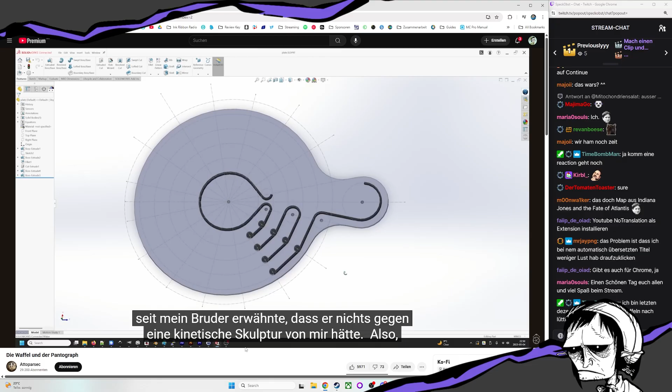But then those concentric rings got me thinking about classical labyrinths, and that's a form I've been meaning to work with for a long time now. I actually have a fairly complete design for a roller chain labyrinth, which I've been working on ever since my brother mentioned he wouldn't mind having a kinetic sculpture of mine.

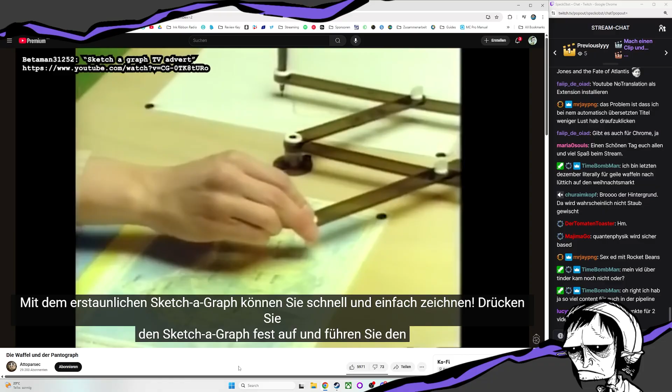You can draw quickly and easily with the amazing Sketch-a-Graph. What? Pin down the Sketch-a-Graph firmly, guide the pointer over any map, picture or pattern.

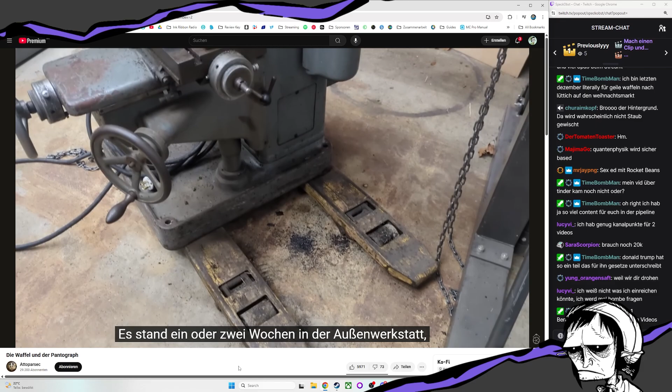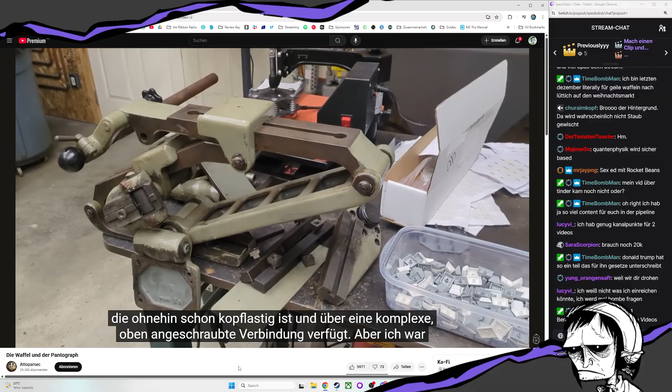It sat in the outer shop for a week or 2 as I carefully disassembled as much from it as possible. It was very heavy, but worse, this thing was top-heavy in particular. That makes sense as it's basically a vertical mill, which is already a top-heavy thing, with a complex linkage bolted on up top. But it did leave me a bit nervous about moving it around by myself.

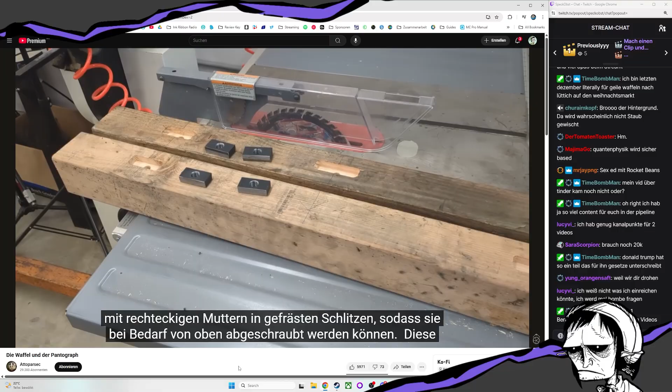I also made a pair of 4x4 skids to bolt it onto, with rectangular nuts and milled slots, so they can be unbolted from the top if need be. These would help me with stability during the move, and also let me set it on the pallet jack, which I was otherwise unsure about due to the forks not fitting very well under the base.

For the 84% of you new to the channel since the last time I brought home a giant lump of cast iron, there's one important thing you have to understand. There is a 6-inch drop from the outer shop, where the garage door is, into the inner shop where the machine tools live. Combined with not particularly tall

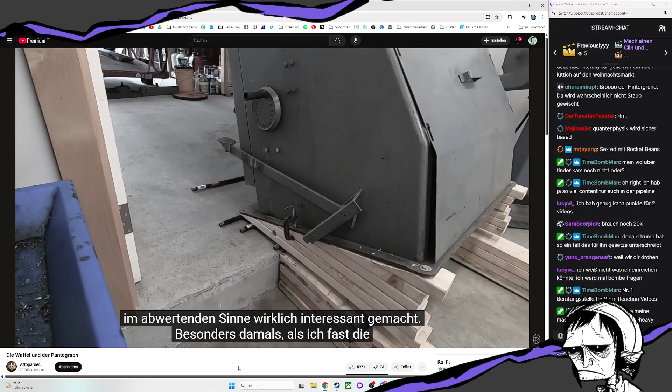ceilings, this has at times made moving equipment really interesting in the pejorative sense. Particularly that time I almost let the bandsaw tip over, because the only way to make the geometry work was to move it through the doorway while leaning back at a 15-degree angle. It all ended up okay, but I wouldn't try it again. Thankfully, this time went a lot smoother.

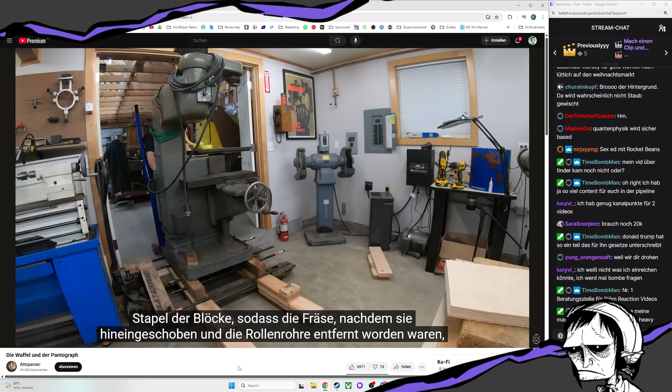I tried something new, including the pallet jack in the stack of blocking, so that after sliding the mill in and removing the roller pipes, it could be immediately moved away from the doorway. This made removing the rest of the blocking a lot easier, and thus safer.

If I'm going to be crouched down operating a toe jack, while a ton of cast iron tips back and forth above me, I really want to be out in the open, so I can flee in any direction if things go pear-shaped.

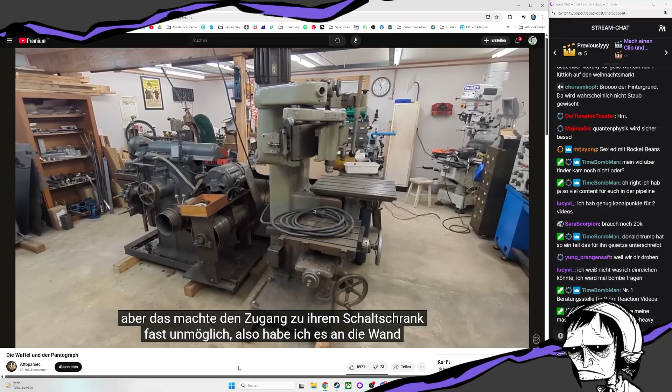At first I placed it next to the shaper, but that made access to its electrical panel almost impossible. So I moved it over to the wall next to the rotary phase converter. This also made wiring it in a lot easier.

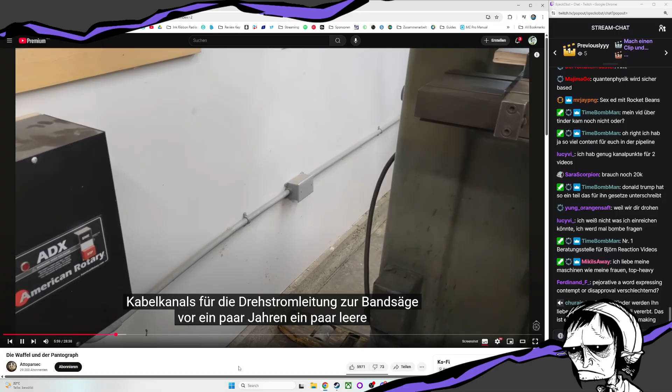As when installing the conduit for the 3-phase line over to the bandsaw a few years ago, I included a couple blank junction boxes for future outlets, should I ever get more 3-phase equipment. Good thinking past me. The inner shop is definitely starting to approach the status of cramped, but I still have room for at least one

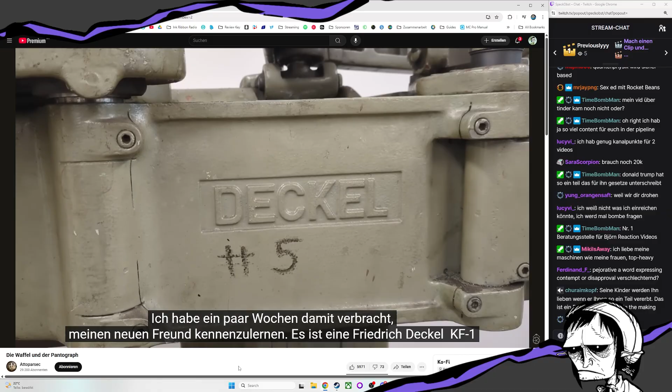It is a Friedrich Deckel! Yeah, baby! KF1 pantograph mill from sometime in the middle of the last century. It was a seriously nice machine, though this one hasn't had an entirely easy life. Basically, you put the thing you want copied on the right-hand table, the copy-holding table, and trace around it with the pantograph stylus. This moves the cutting head on the table on the left, the work table, in the same path in all 3 dimensions, or one scaled up or down depending on how you have it configured.

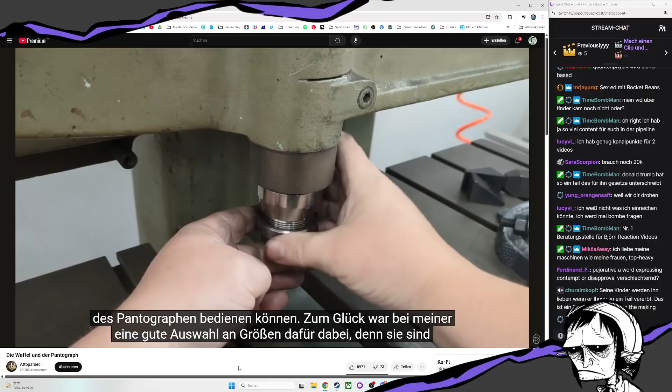First, I needed to be able to operate the collets on both the stylus and cutter side of the pantograph. Luckily, mine came with a good range of sizes for these, as they're ridiculously expensive, but it didn't come with any wrenches for actually operating them. These were the relatively specialized sizes of 42 and 42 millimeters on the cutter side, and 36 and 32 millimeters on the stylus side. Ideally, I wanted a pair of 42-36 and 42-32 millimeter double-ended wrenches so that just the pair of them could serve both jobs and they would just live by the mill. Failing to find any, I drafted up a simple wrench design which I sent off to get cut.

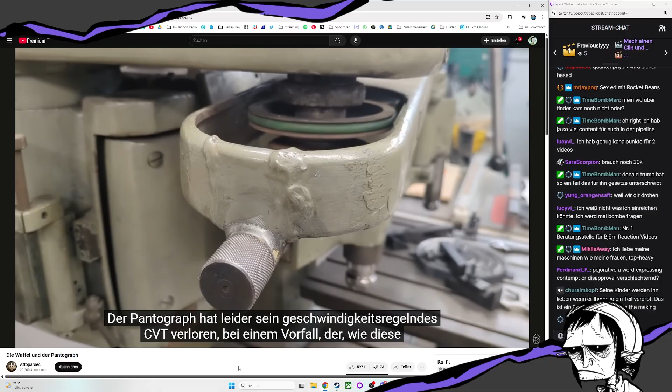Solved. The pantograph has lost its speed-adjusting CVT, unfortunately, an event that this rather clumsy repair on the cowling

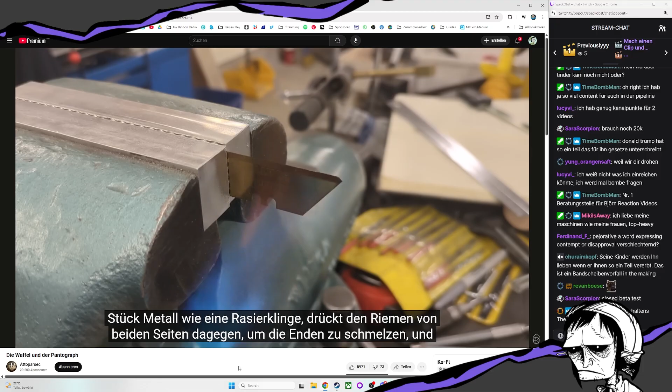suggests was at least moderately energetic. It's been replaced with a simple fixed belt drive, which in turn drives the round belt which runs out to the cutting spindle. The round belt that came with the machine was shedding fiber every time I turned it on, so I figured it was best to replace it now. I got some urethane round belting, and finally got to try that trick I'd seen, where you heat up a thin piece of metal like a razor blade, push the belt against this from both sides to melt the ends, then slide them up off the blade into contact with each other, welding them into a single loop. And it worked. First try.

Mine also lacks the attachments needed to either scale up or down in size while copying a part. Scaling up isn't much of a loss because you can't really cut hard metals that way anyway. The leverage is working against you and you can't maintain control of the cutting end. Or at least, that's my purely theoretical understanding. But being able to scale down really would be nice, if only just to be able to engrave text at a reasonable size. Spare parts for these are rare and pricey, but I think I should be able to make my own. But that's a future project.

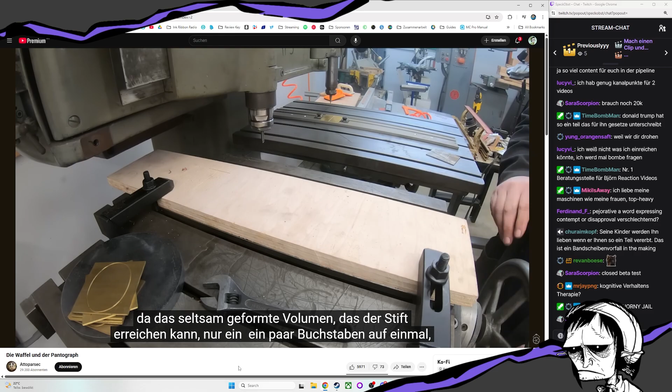I bought a set of engraving letter templates to play with, and shortly after learned that the name for this weirdly ubiquitous typeface is Gorton. It's iconic yet anonymous, which is a really cool combination. The letters turned out to be a bit large, as the oddly shaped volume which the stylus can reach can only handle a couple letters at a time, but it did make me feel more confident about setting things up for copying. So it was time to get serious about the waffle thing.

After failing to find one at local Goodwills, I ordered the cheapest waffle iron I could find that had removable plates, and set about designing my replacements. As well as mimicking the overall dimensions so it would actually fit in the waffle iron, I also made the slots on mine have the same profile.

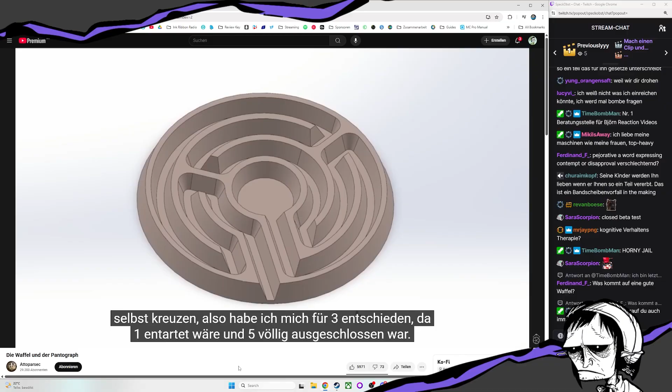At first I directly designed the waffle, so I could work things out like how many concentric rings there would be and what the path layout would look like. The number of rings has to be odd or else the path would have to cross over itself, so I went with 3, as 1 would be degenerate and 5 was right out. But what I needed was a design for the plate that would make the waffle, not the waffle itself. I needed to make a waffle negative, that is.

And the plate had to be machinable, which meant the path had to be something a cylindrical or conical shape could move through. So you can have sharp exterior corners, since that's

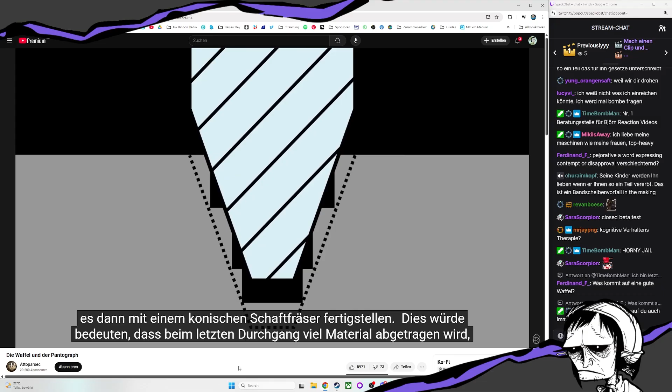This would mean the last pass was cutting a lot of material, but I was planning to do this in cast iron, which is quite machinable, so I was hoping that could work. The other option would be to print out a full 3D template of the entire plate. On the pantograph, between each pass, both the copy holding and the work holding table would be raised slightly. This means the stylus would trace out a slightly different path as it worked its way down the tapered sides of the slots. The majority of the...

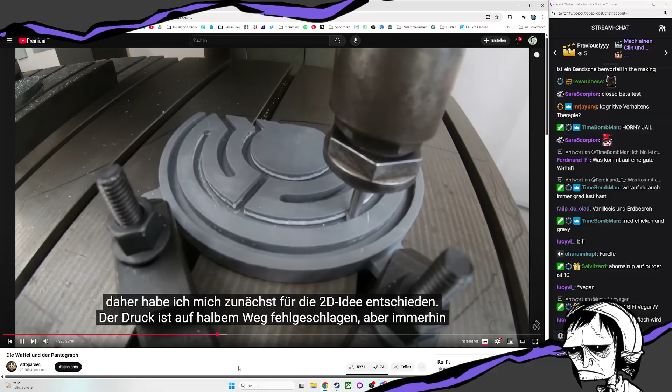Print failed halfway through, but at least I could set it up in the pantograph and try the basic idea instead.

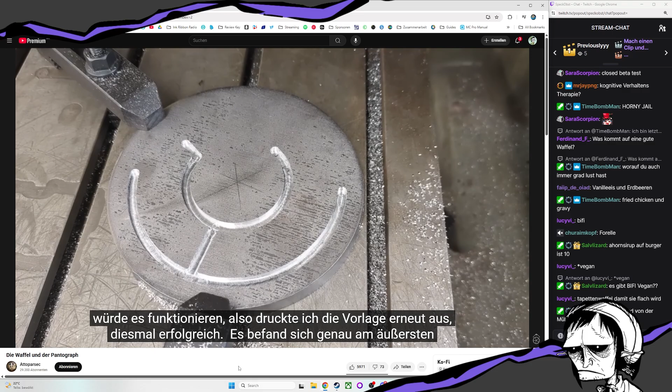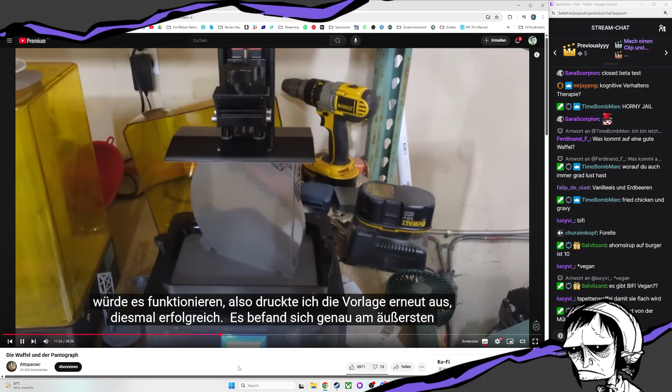It was right at the very edge of my print volume, only fitting if I placed it vertically, running from one corner to the other of the print plate. I even had to go with 4 clamping lugs instead of 3, so that they could be placed 90 degrees apart and not add to the height.

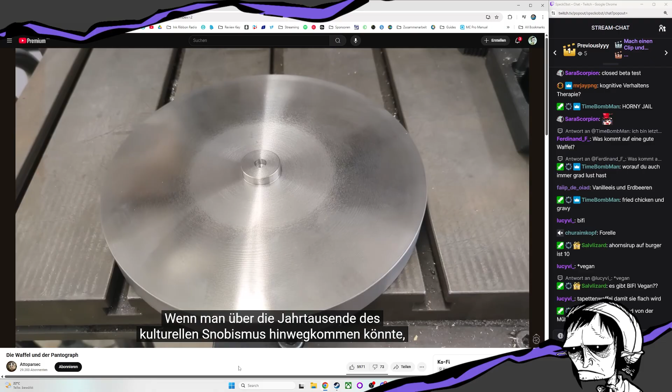Plus, I just think machined cast iron is gorgeous. If you could get over the millennia of cultural snobbery, I really think that the luster of machined cast iron would be ranked as highly as that of gold.

I needed 2 discs that were 3/4 of an inch thick and a bit over 7 inches wide. This meant I had to order 1-inch thick discs that were 8 inches wide. Except when they turned up, they were more like 1.3 inches thick. So could I have ordered 1/2 inch thick discs and they would have turned up thick enough to work with?

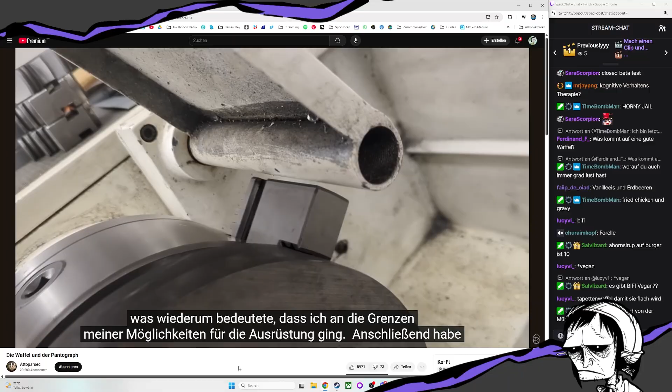We'll never know. First, I cleaned up the faces, which again was running things right at the edge of the envelope for my equipment. With that done, I drilled and tapped a blind hole on one side. This let the blank be threaded onto a mandrel held in the 3-jaw chuck, giving me complete access to the front, sides, and most of the back.

You might think machining is about cutting metal, but that's actually a distant third after thinking about work holding and order of operations. Using this new mounting, I could turn them down to the final thickness of 3/4 inch, generating an endless stream of powdery chips in the process.

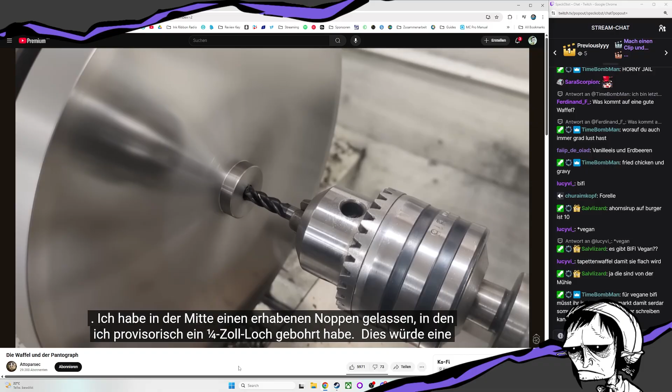I admit, I'm really including the shot to see how the YouTube video encoder handles something so close to pure noise. The front face wasn't made entirely flat though. I left a raised nub in the middle, in which I drilled a temporary 1/4 inch hole. This would provide easy centering when I set them up on the pantograph.

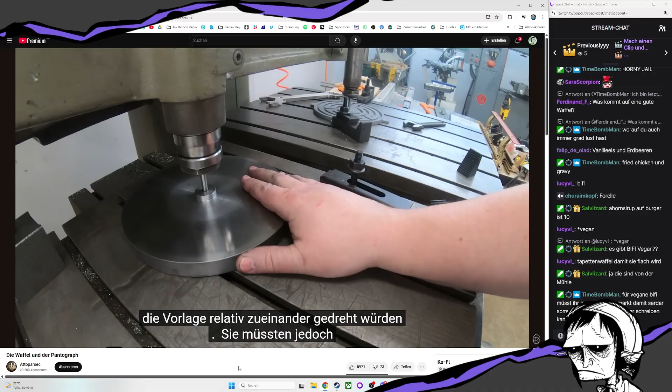It wouldn't matter how the blank and the template were rotated relative to each other, being circles, but they would have to be exactly the same distance apart as the pantograph stylus is from the cutter, or else the labyrinth wouldn't be centered properly in the disc. The easiest way I could think to do this was to include a centering hole in the middle of each one, mount rods of the same size in both sides of the pantograph, place these in the holes, and clamp everything down. Simple.

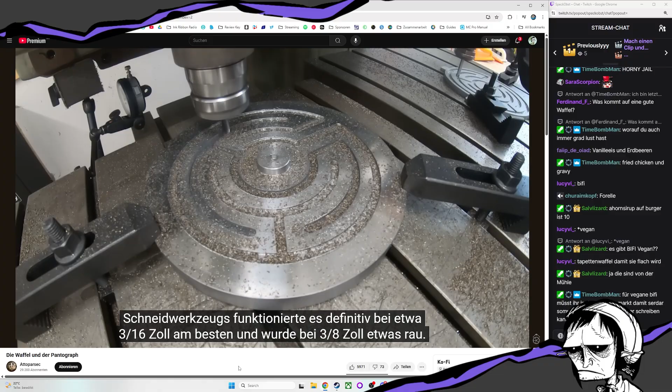As I had planned, I started by using a series of normal cylindrical end mills to remove the bulk of the material. This worked okay, though because of my limited speed control of the cutting tool, it definitely worked best at about 3/16 inch and was getting a bit rough at 3/8. Because I was cutting down into what would...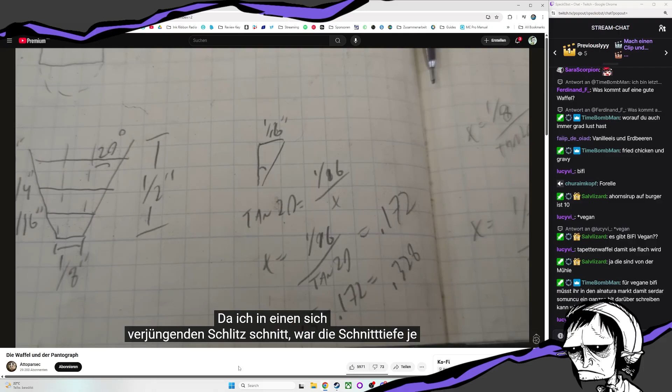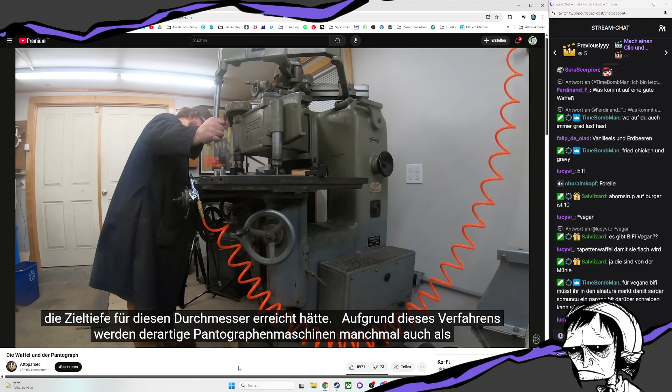3/16 inch and was getting a bit rough at 3/8. Because I was cutting down into what would be a tapered slot, the depth each one could cut to was different depending on their diameter. I'd work out this target depth after changing the tool, then do a series of passes following the template, raising the work table between each pass until I had reached the target depth for that diameter. Pantograph machines like this are sometimes called die sinking because of this process. You sink the design into the die being made, with each pass being a bit deeper.

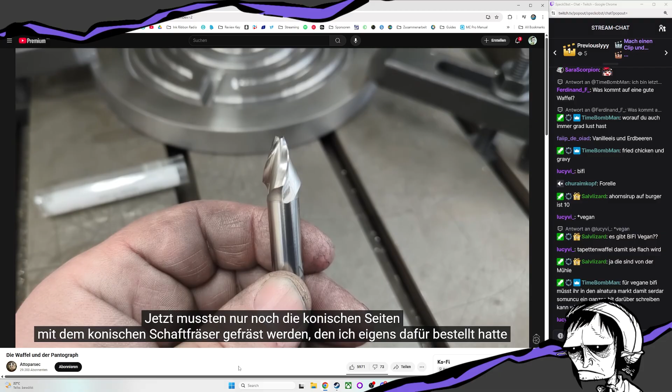Once this was done, I was left with the path cut all the way down to 1/2 inch depth with stepped walls. All that was left was to cut the tapered sides using this tapered end mill I had ordered for the purpose. I started with the work table raised, so it was just barely cutting, then followed the same process of raising the table between each cut. Unlike the cylindrical tools, however, this meant it was cutting more and more material with each pass. This was where my relative lack of control over the RPMs became a real problem.

As it approached the bottom of the slot, it started to sound pretty unhappy. And worse, it didn't seem to be removing much more material when the table was raised. A closer look showed that, yeah, it had not survived the attempt unscathed. I had been thinking that cast iron was machinable enough that this wouldn't be a problem, but, well, my machining instincts are still a long way from perfect. It was time to pivot to the other approach.

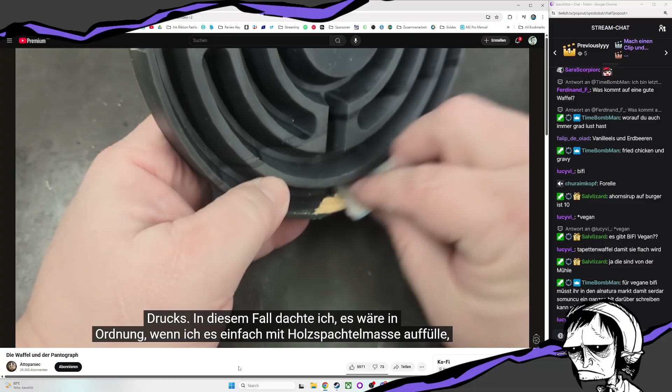I printed the full 3D template, and it mostly came out fine, except for this kind of squishy, distorted section. This has been happening in the very center of the print volume for me recently, possibly because of an FEP that needs replacing, but it only affects the first few centimeters of the print. In this case, I thought it would be fine if I just filled it in with wood filler, a decision I would definitely not come to regret almost immediately.

The setup on the pantograph was the same, and it started with the same process of bulk removal using the cylindrical end mills. Unlike before, when I had raised just the work table between each pass, this time I wanted to raise both tables. That way the stylus would work its way down the sides of the slots just as the end mill was doing the same. But that's a really awkward and error-prone process for something you're going to have to do a lot. It would be way too easy to let the tables get out of sync with each other, ruining the part. Luckily, the engineers at Friedrich Deckel weren't fools. You can turn this single dial up top, and that will raise and lower the entire...

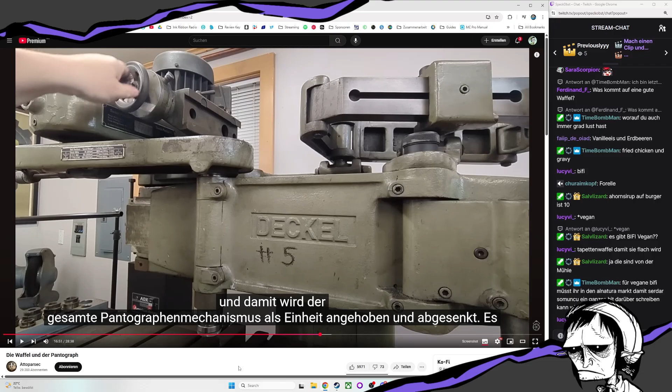Pantograph mechanism as a unit. There's even a little ratcheting device on the wheel, which lets you quickly and easily increment it by a set amount.

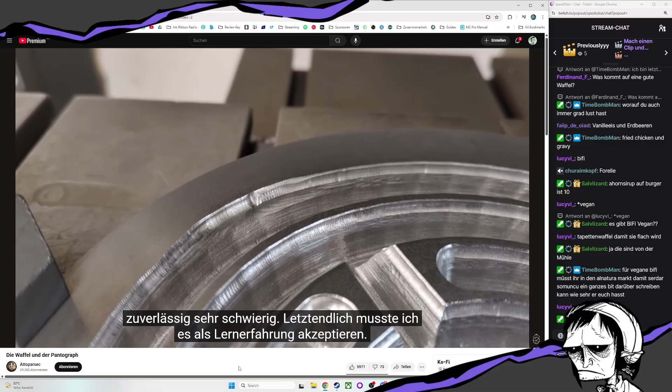But that wood filler? It got turned into powder, a bit more with every pass. The underlying print even cracked eventually, being so thin. I tried to keep the stylus away, but the cutting forces made that very hard to do reliably. I just ended up having to accept it as a learning experience. If I ever have to patch a template again, I'm using epoxy putty.

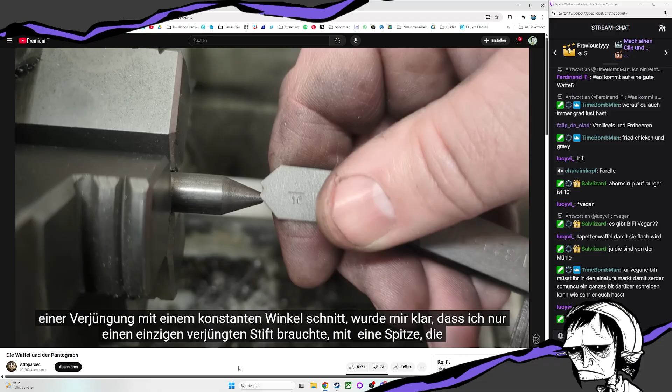But as soon as I switched to round nose end mills for finishing the slot, I also realized I'd been being silly about the styluses to begin with. At first, I was going to make a new stylus for each size of round nose end mill, but because all I was doing was cutting the sides of a taper with a constant angle, I realized I just needed a single tapered stylus, with a tip that was rounded to the same radius as the smallest end mill I was going to use, in this case 1/16 inch.

As long as I set the relative height between the tables correctly to begin with, this would always keep the cutter at the right height.

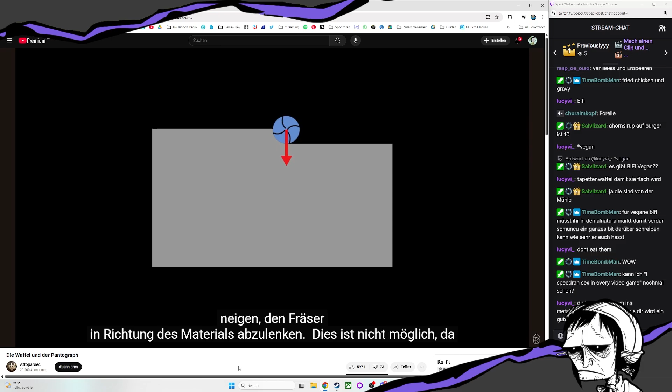Normally, you want to move it opposite the rotation. This means that as the teeth bite in, the cutting forces tend to deflect the cutter towards the material. It can't do that since solid material can't pass through other solid material very easily, so it doesn't deflect much. This means you can take deeper, faster cuts, though the surface finish isn't always so great. It's called conventional milling because that's how you make most cuts.

Going the other way is called climb milling, because now the cutter wants to deflect away from the material, lifting itself up into open air. That's a lot more...

The cutter will happily snap itself in half if you try to take too deep of a cut when climb milling. But the surface finish tends to be nicer, so you will often do almost all your material removal conventionally, and then take one final light climb pass to clean things up and take it to final dimension.

And not surprisingly, you can really feel these forces at work when the cutter is at the other end of a pantograph. There was also some roughness at the top of each slot. I had started with my last 1/4 inch end mill on those, and it was a bit dull. Combined with the less than perfect feeds and speeds, it had resulted in a fairly rough cut there.

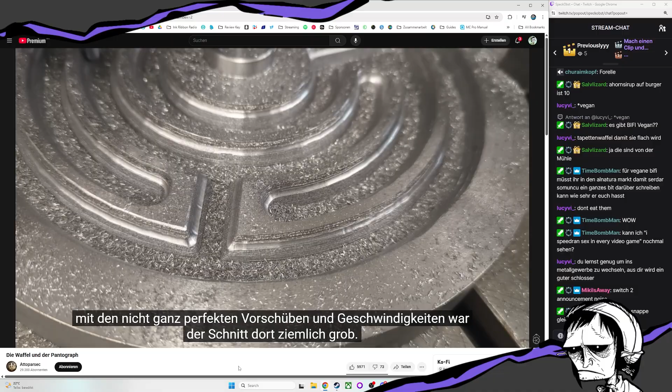Ooh, the forbidden pepper. I tried to clean this up with a couple more passes on the 1/4 inch round nose, but this ended up widening the slot considerably with a fairly

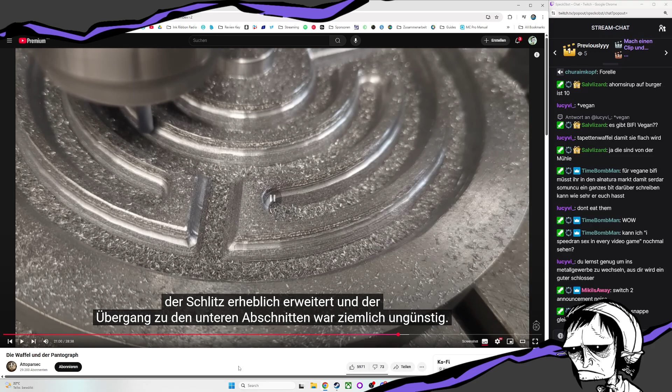awkward transition to the lower sections. I now realize that what I should have done was use the tapered end mill with the full 3D template.

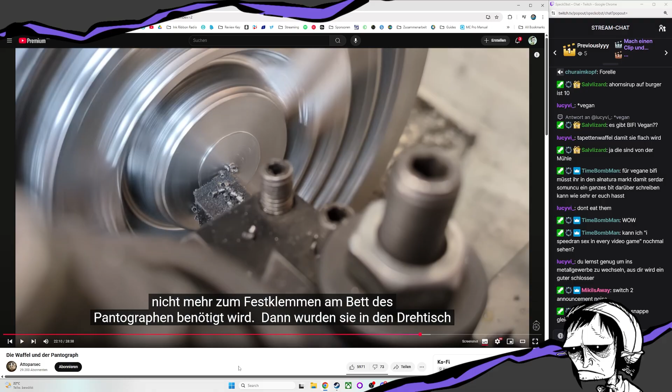clamping to the bed of the pantograph. Then they went into the rotary table on the mill, aligned first in X and Y by sweeping the perimeter, and then clocked in rotation so that the exit slot was aligned with the Y-axis. This was all just so I could cut the slots where they mounted in the waffle iron.

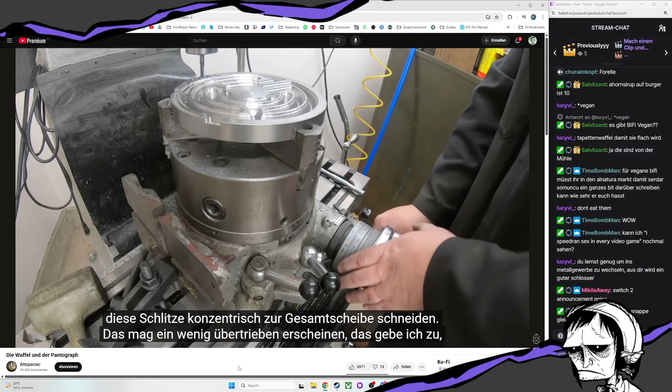This didn't have to be done on the rotary table, but this let me cut those slots concentric with the overall disc, which might seem a bit precious, I'll admit, but also it let me cut these long grooves around the outside to match the original plates. Batter gutters, as I've been thinking of them. This couldn't be done on the lathe, or else they would have intersected with the mounting slots, see? So the rotary table was definitely justified.

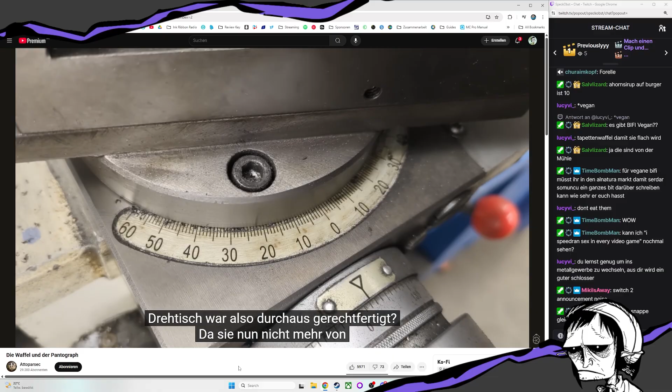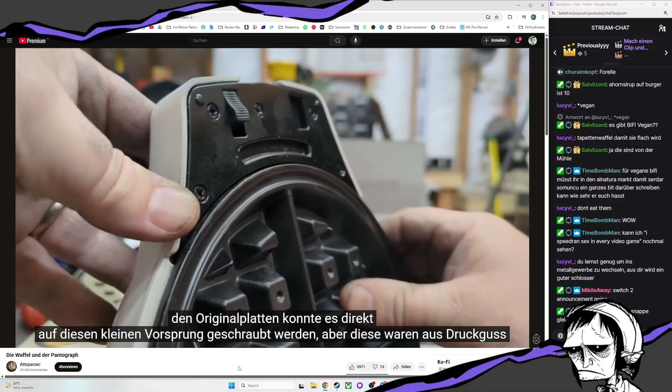Now that they no longer had to be held from behind, they went back onto the lathe to have the last of the material removed from their backsides, so they would actually fit into the waffle iron. And they fit. Except they still needed a little tab so they would be held in place by this toggle mechanism on the iron. On the original plates, it could be screwed directly onto this little boss, but those were die-cast and could have random features like that wherever needed.

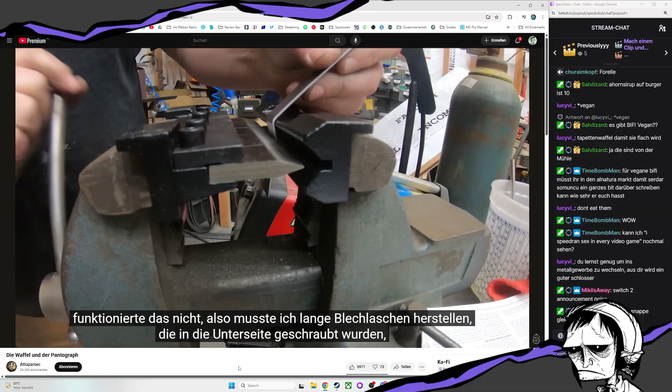Since mine had been turned on the lathe, that didn't work, so I had to make long sheet metal tabs that screwed into the bottom, where there was still enough material to drill and tap 2 small holes. This was one of those almost trivial final tasks that is way more of a hassle and takes way longer than you expect. But finally, the labyrinth waffle plates were complete. They just needed to be tested.

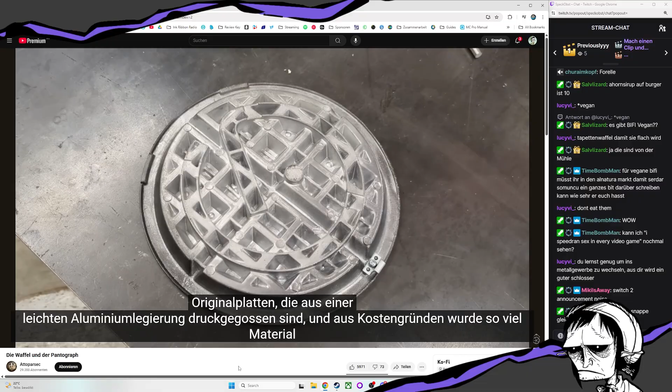I started with a smoke test without any waffle batter, just to see how the iron would handle them. They are considerably more massive than the original plates, which are die-cast from some light aluminum alloy, and have as much material removed as possible to keep costs down.

Only the exact areas above the heating elements are full thickness. Otherwise, you can see all the way down to the back of the little divots at the bottom of each waffle cavity. Theoretically, I could have done something similar in the pantograph, but I don't mind them being heavy. I quite like it aesthetically, in fact. That is, as long as the waffle iron can get them up to temperature without melting down in the process.

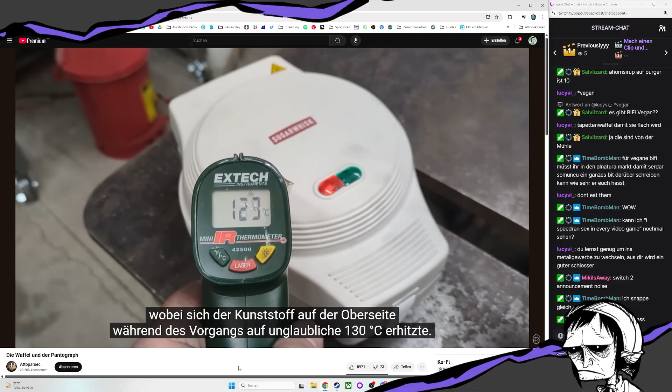It took over 10 minutes to do so, with the plastic on the top face getting to an eye-watering 130 degrees Celsius in the process. You can actually see the thermal expansion at work in the time-lapse. But the only smoke released was from the freshly machined plates themselves, and I couldn't find any discoloration of the plastic once it was back down to room temp, so I figured there was no reason not to try it for real. But first, seasoning.

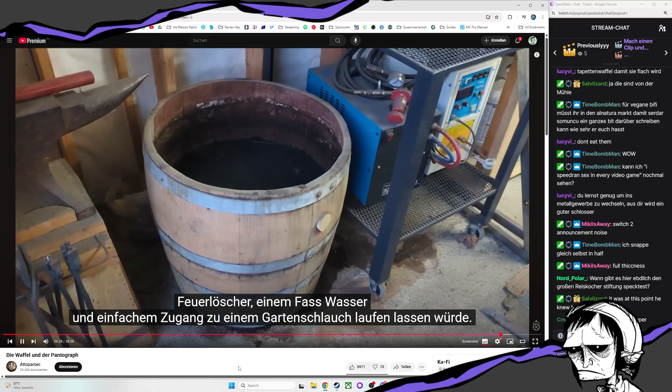I knew I would be running it on a steel welding table in an unfinished shop space with good ventilation and a large fire extinguisher and a barrel of water and easy access to a garden hose. But this is the kind of thing that if you mess it up and there is a fire, insurance isn't going to cover anything, and there could be legal implications. If you tamper with the safety devices on an appliance, you're on your own, buddy.

So, not just because I've never had a chance to say this before in a video, do not try this at home. Even if the appliance in question is smiling at you as you disassemble it.

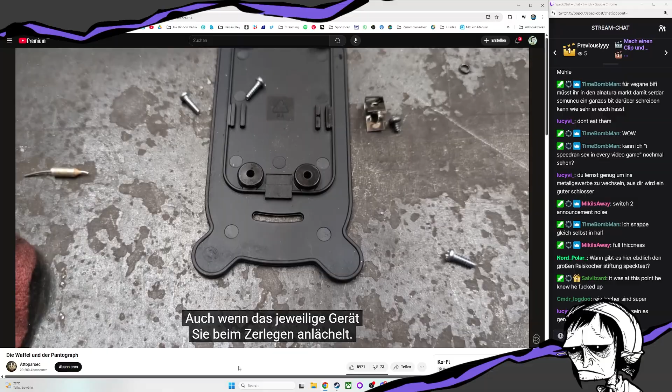Before the second live test, I put the plates back on the lathe and faced off 2mm from the middle of each one, to save room for the connecting bits of waffle. And then re-seasoned them, of course. I also pulled out my big shop fan to try and provide a bit more cooling to the outside of the iron. And this time, we made it to 5 full minutes without the iron melting down.